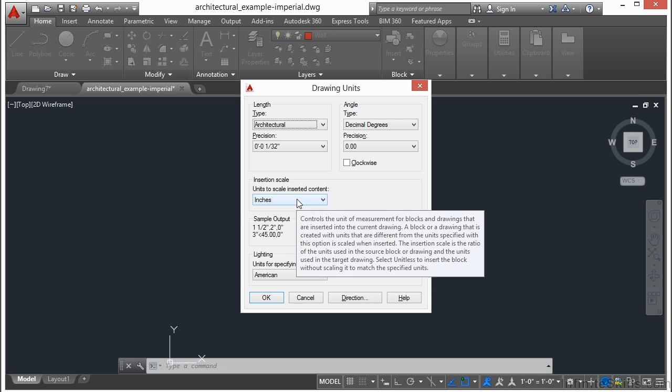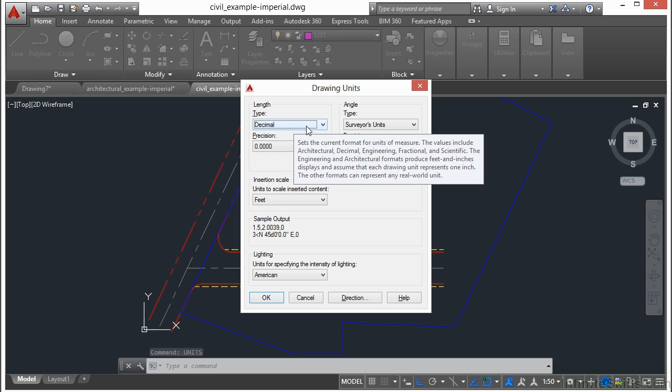Now if we open up in that same folder the civil example Imperial, click open. This is just a simple roadway here, a little pond, and a couple of residential lots with an area where a building is going to be. Now, if we type in the word units, we see that this drawing is set up to be decimal feet. Precision is at 4 decimal places, and our units are set up to feet.

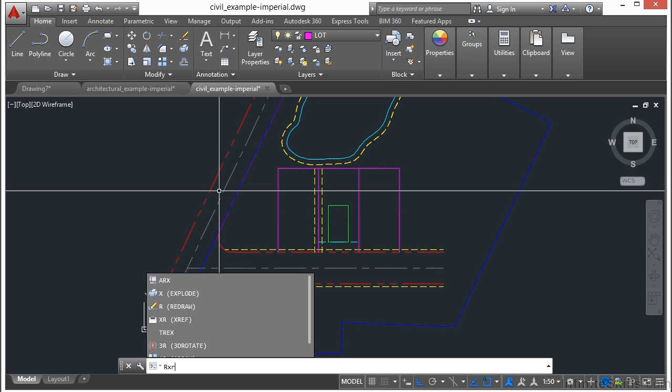So whenever we type in the number 1, we're drawing at 1 foot long. In our other drawing here, the architectural example drawing, when we type something 1 unit long, it's 1 inch long. So now if I want to reference this file in, type in xref, this will open up my xref manager. This will allow me to reference one file into another, and that's what I'm going to do here.

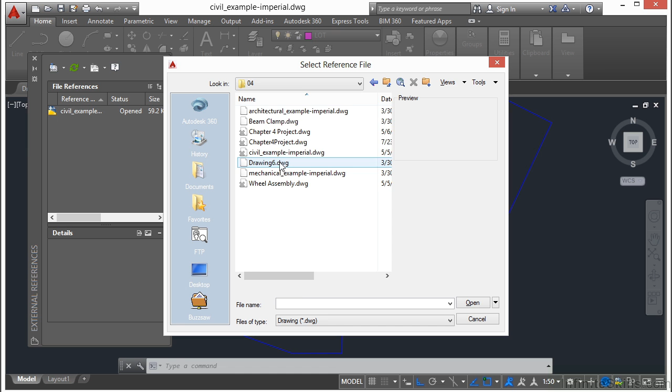I'm going to reference in my architectural example file. And here it is. I'm just going to insert it right there. So now you see my drawing right here of my building. And because I have my units set up properly, I can put it on one of my lots.

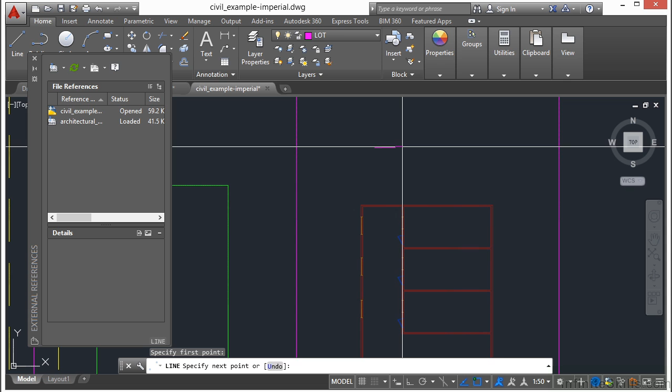Now, AutoCAD knows that whenever I draw something 1 unit long here, as an example, I'm just going to draw a line, type in 1, and it is 1 unit long. Now we see here that this item in comparison is 1 foot long. That looks about right. This wall is about 1/2 foot. So that line should be about twice as long as that wall is wide.

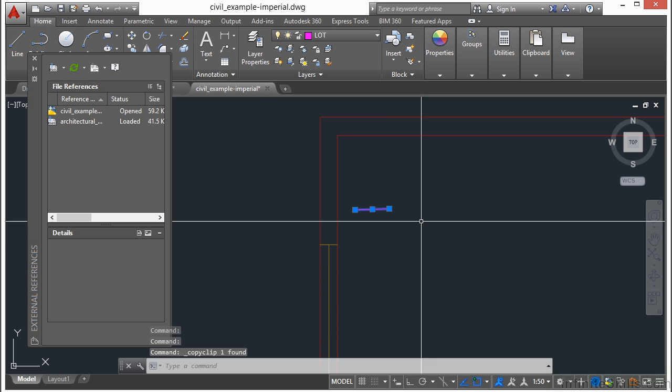If I select it here, press Control-C to copy that object, and go back into my architectural drawing. Remember, I'm bringing in an object that's drawn at 1 unit, and it should be twice as long as this wall is wide. Control-V. It's not. We see it's much smaller. Very much smaller. Because in this drawing file, AutoCAD sees 1 unit as being 1 inch. So that kind of gives you an idea.

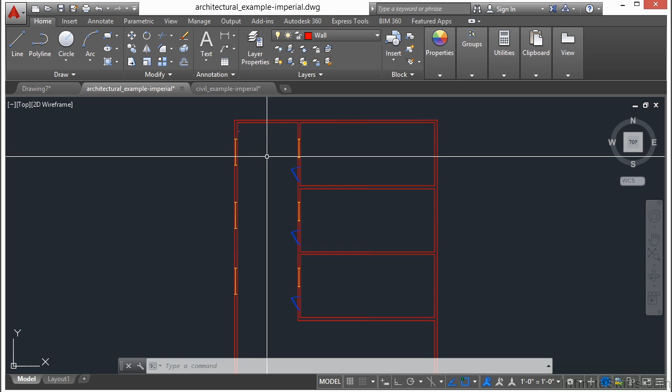But when I'm using reference files, AutoCAD says, hey, look, my main drawing that I'm in, the civil example drawing, is drawn in feet for units. And the file I referenced is drawn in inches. Oh, that's a scale factor of 12. I need to scale this so everything is drawn correctly in real world lengths and units. And so it knows that. Now that's great. So that's one important reason to make sure that you have your units set up.

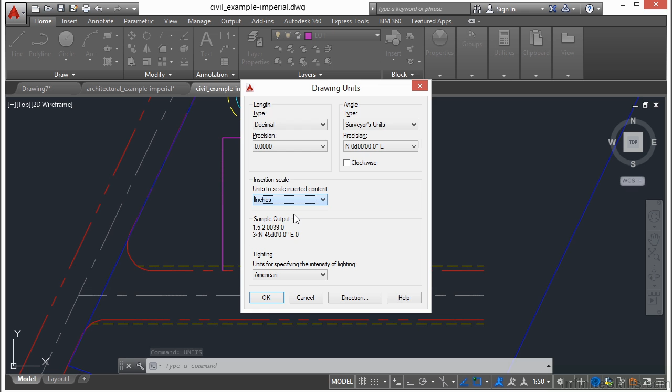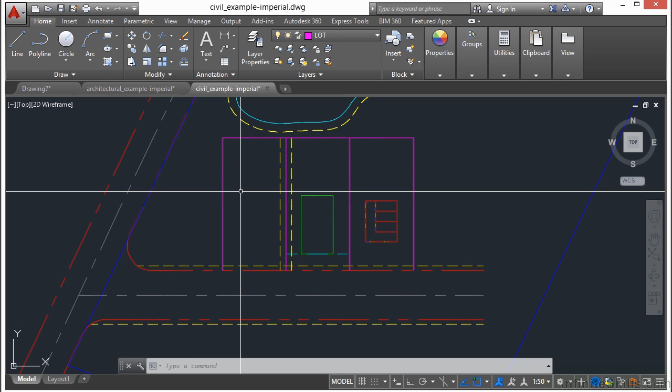Now, if I have these set up incorrectly, say that I set them to inches, click OK, and I try to reference this in, it's going to be 12 times too big. Now, this also works between imperial units and metric units, or vice versa. So it's great. So keep in mind with this little demonstration that your unit of measure in AutoCAD is relative, but it does matter, especially when you're working with other drawings defined with different units.